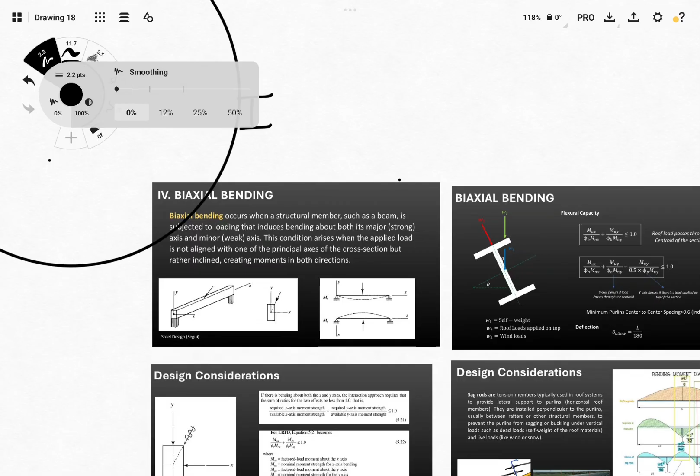This happens because of two ways. First, if you have loads applied on the weak axis - like a uniform load or concentrated load along the length, applied laterally on the y-axis. So for example, we have this section with loads like that, whether uniform or concentrated, applied along the sides of our section.

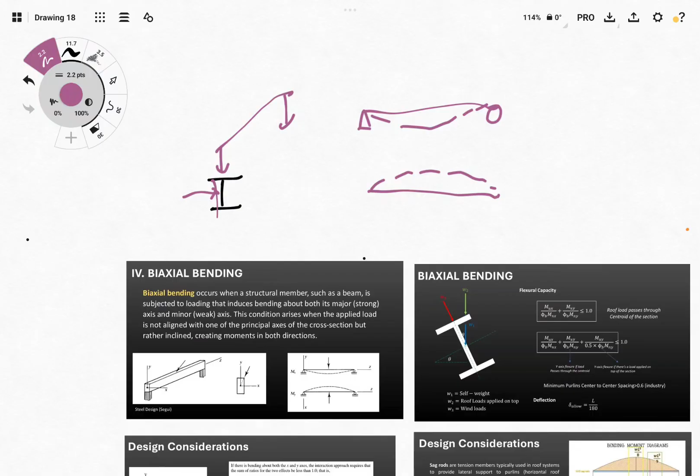It will develop a moment on the weak axis, unlike the usual case where our load is transverse or gravity loads - a uniform load causing deflection or bending along its longitudinal axis. But when we load it laterally, looking at the top view, it will also have deflection but sideways, the same as lateral torsional buckling - the sideways bending is caused by the moment about the y-axis.

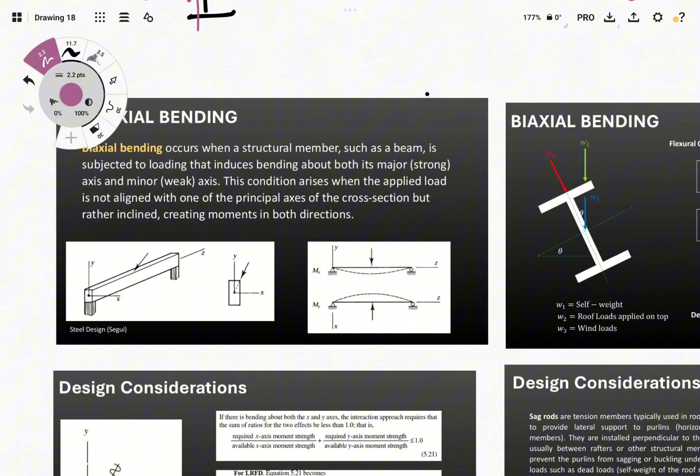When your section has an inclination, even if your loads are just due to gravity, it will have components - what we call normal and tangential. The normal acts along the strong axis while the tangential acts along the weak axis. So those are the two ways we can have bending moment about the weak axis.

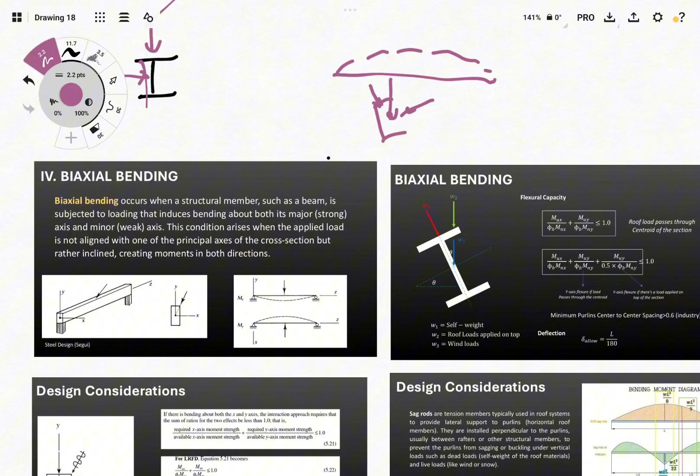First, if you have loads applied laterally, and the second one, if your section has an inclination or orientation that is not with respect to the usual horizontal axis.

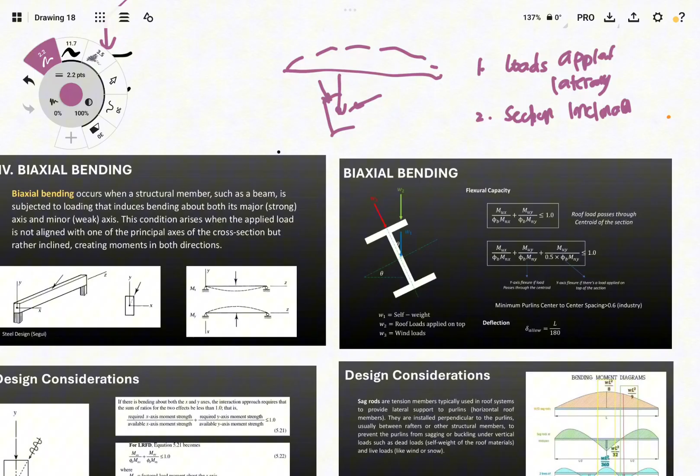Okay, so how do we treat this? The most common case in CE2212 - we'll focus on the section oriented with an angle of inclination. That will be our example for this discussion.

So what do we do? What are the common loads applied if we have this kind of section, especially for roofings or purlins? These are the common loads.

First, the self-weight - that never goes away. And what do you notice? W1, due to self-weight, is applied at the center of the cross-section.

The second one is still a gravity load, but this comes from our usual roof loading like superimposed dead load or live load. It is still applied at the center, but now at the top of the section - not directly at the centroid, but the application is up there. Since most of our roof loadings are placed here, we assume these loads are applied at the top of the section.

So W2 is still a gravity load, and it includes both the live load and the superimposed dead load, applied on the top of the section.

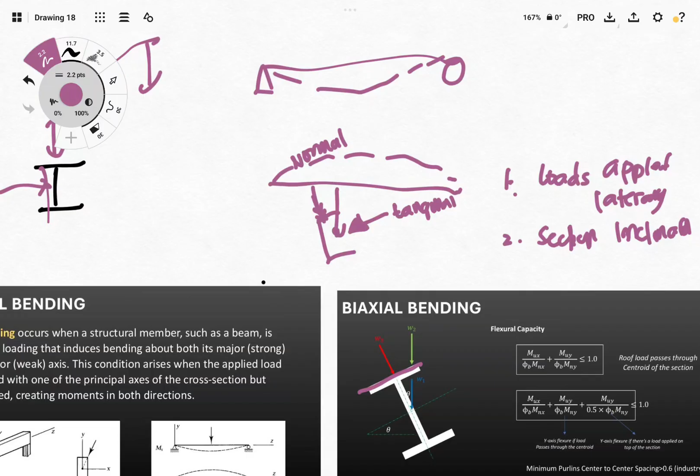Right? So they're different - tangential becomes the lateral load, and normal, when rotated, becomes like the gravity load.

Now the issue is that the gravity loads, especially W1 and W2, will have components - W2 will have a tangential and a normal component. The same goes for W1.

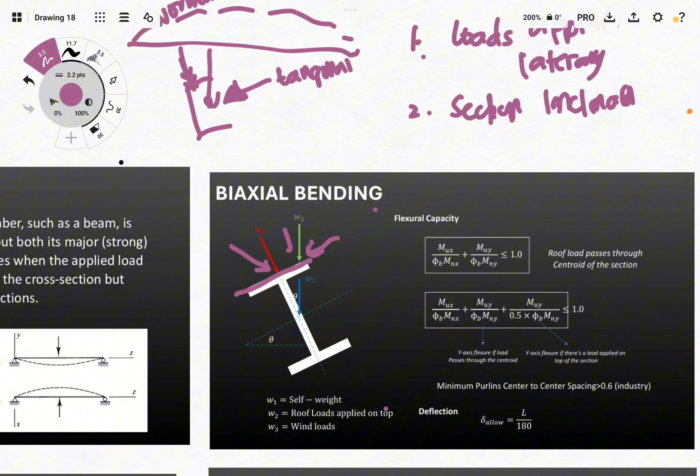But our wind load, W3, as is, is applied perpendicular or along the normal axis of the section, so it won't have a tangential component - unless W3 has a specified orientation. That's how the application would be, but most of our assumptions for wind load is that it's directly applied normal to the axis of the section. So those are the loads we're interested in for purlins or roof flexural members placed on the roof.

Okay, so how do we treat this kind of problem? The same way as we treat uniaxial bending, but with an additional component.

The best way to say if a section is safe is through DC ratio. We know that DC ratio is demand over capacity. The demand is based from the loads. We need to obtain the values of the moments due to the applied loads, and also the capacity of our section. So that's the demand over capacity.

Unlike in uniaxial, where that's already enough to know if the section is safe, since we now have two axes in consideration, we have two types of moment. We also need to compute for the DC ratio contributed by the moment applied about its weak axis, which is MUY over the capacity along its weak axis.

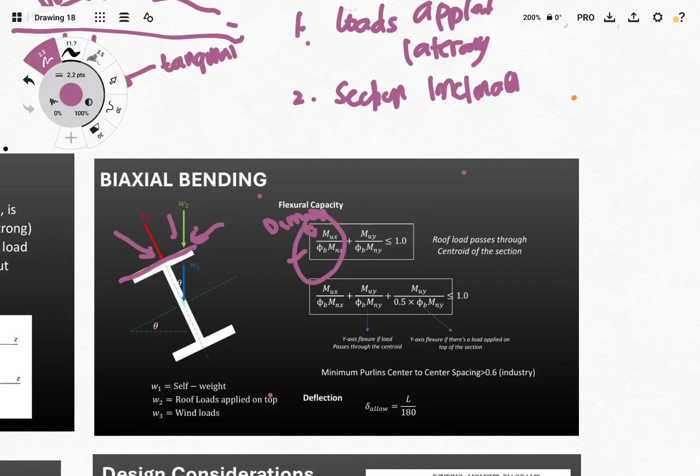The concept is the same. We already know how to solve for the flexural capacity for the strong axis. We just add section 506.6 for the weak axis bending. For weak axis bending, take note that there's no lateral torsional buckling. It's only when we check for the tendency of slender elements or local buckling that we can solve the capacity about its weak axis.

But there's an additional note you have to consider. We need to separate the tangential loads, because the tangential loads developed by the roof loads applied on top have a different consideration for the capacity that we are going to use.

If your loads are applied directly at the center, which is mainly the tangential load caused by the self-weight, we consider the full moment capacity of the weak axis. But if we consider the tangential load caused by the loads applied on top, then it becomes only half of the capacity, because it's applied at the top, not directly at the center. So we assume the moment capacity resisting the loads applied at the top is only half of the capacity, since it's only acting on that part.

So that's how it is. Later on you will understand this, and find out how to separate the loads so we can obtain the DC ratio, with the tangential loads applied at the center separated from the tangential loads applied on top of our section. Make sure that for the section to be safe, the total DC ratio must be less than 1.

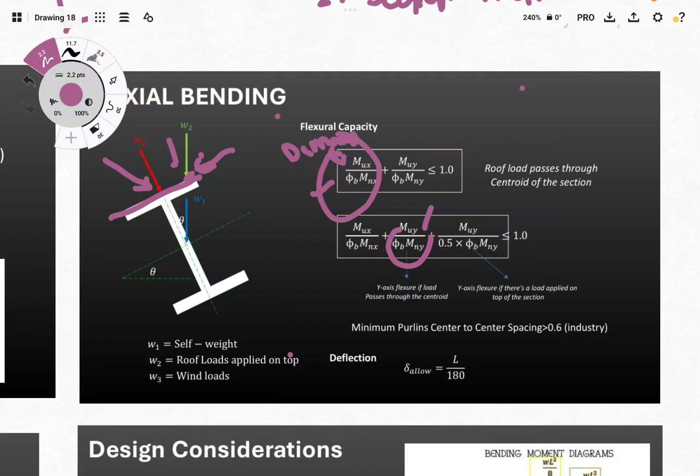As long as you've solved that the section is okay even with a spacing beyond 0.6, then the section is fine. But if you increase the spacing, the tributary loads also go up, because to convert the floor loads into uniform loads, we consider the tributary width. The loads we apply from the code are usually a uniform pressure load in kPa, so you need to multiply it by its tributary width to get the uniform loads.

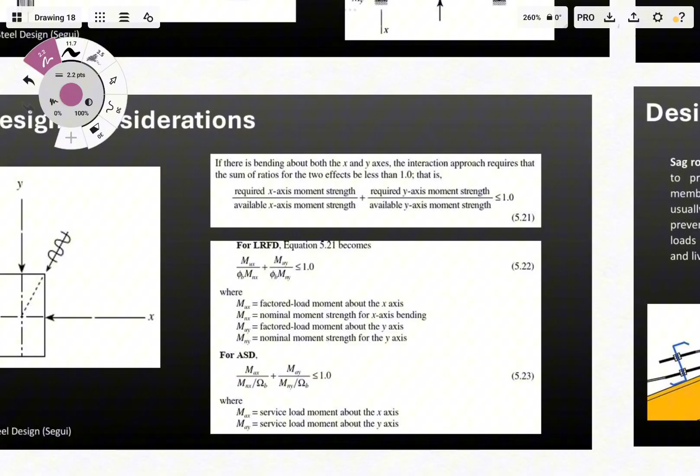So those are the considerations. These are some additional formulas, similar to what I showed before, but here it's not specified which capacity to use whether the loads are applied at the center or at the top of our section.

Now we have this additional important note. These are the sag rods, in order for the section to not deflect or move sideways. It will act as a bracing for our strong axis, to prevent excessive sagging or lateral sideway movement of the section. So we add these sag rods, which act as a lateral bracing for the section. When you have sag rods like this, the unbraced length of the section is reduced. So the effect of that is on the length, the unbraced length that we consider when we solve for the strong axis section.

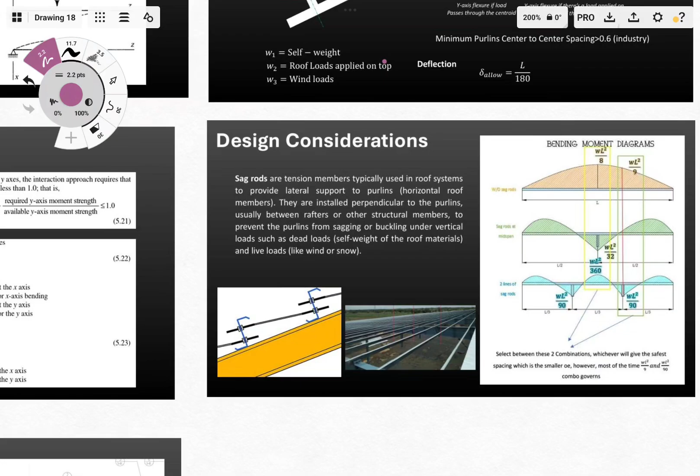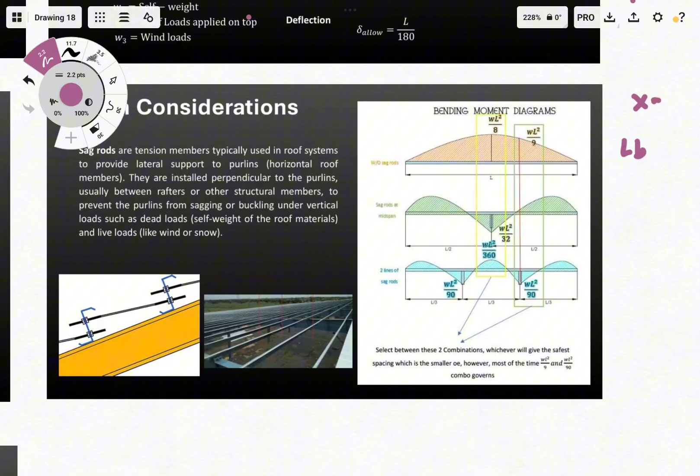So when you have sag rods, and the problem states there are sag rods at midspan, the LB you will use for solving the flexural capacity will become half. But in solving for the maximum moment, you still need to use full L. That unbraced length is only used to solve for the capacity. Now, the effect of that will also affect something else.

When you have sag rods, the moment in the y-axis will change, although our loads are considered uniform load, and the purlins are simply supported, wherein your maximum moment is just WL squared over 8. But that is the maximum for the x-axis. If you consider the moment in the y-axis, it changes, since the sag rods act as supports in the y-axis. So this one is for y-axis, this is for x-axis. But for the y-axis, the moment diagram could be like this, or like this, or like that, depending on what is specified in the problem.

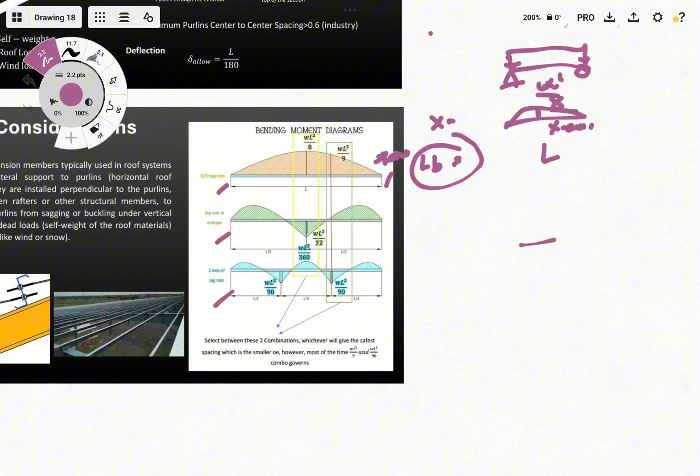So when this happens, we need to find the maximum moment - later on I think you'll understand this better. For example, if the problem states that the sag rods are applied at center, the maximum moment you'll use for x-axis or strong axis, MUX, is WL squared over 8. But when there's a sag rod, for the y-axis, it's not WL squared over 8 that you'll use anymore. The maximum moment for y-axis becomes WL squared over 32. But if there's no sag rod, that moment is just WL squared over 8.

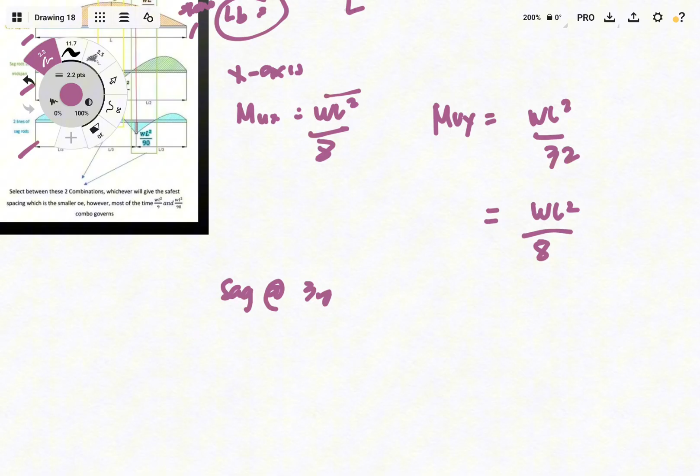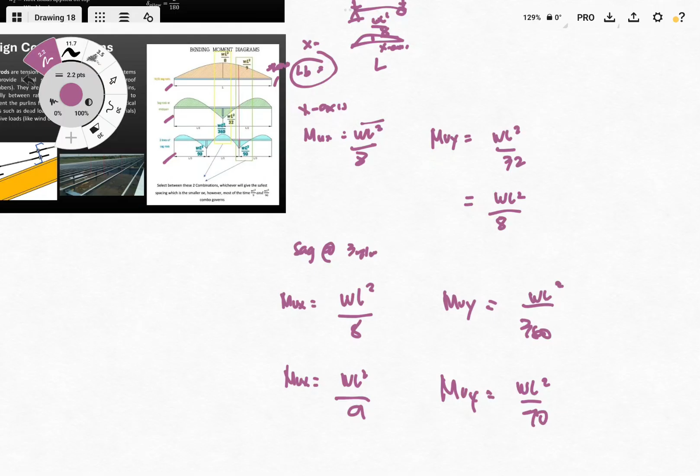Now, if you have sag rods applied at third points, there are two combinations needed. For example, if you have sag rods at third points, for your x-axis, the MUX can be WL squared over 8, and for your y-axis it becomes WL squared over 360. But you also have to check the combination where your MUX becomes WL squared over 9, and the corresponding one for Y is WL squared over 90. Whichever gives the maximum moment will govern, that becomes critical. So you have to check each of those moment diagrams.

Okay, so let's have this problem. A roof system is supported by trusses spaced 6 meters apart, and the purlins used in this system are ASTM A36 and are equipped with sag rods positioned at their midpoint.

Positioned at their midpoint. You may hear some hammering noises, so I try not to go live sometimes because of this. We're not certain when the hammering will happen, because there's construction going on. But regardless of that, we will still be having this asynchronous lecture, and I hope if you have free time, so that we don't need to have a meet up, what do you call it, makeup classes, then we can have this asynchronous online session.

Okay, so going back to this problem, we have the roof inclined at 15 degrees. So these purlins are designed to carry service dead loads, with a pressure load or floor load of 300 Pascal, a service live load of 400 Pascal, and additional wind pressure of 0.8 kilopascal. The first thing we need to solve is assess whether the purlins spaced at 0.8 meters apart are structurally adequate for flexure - we won't check shear yet since we haven't discussed that.

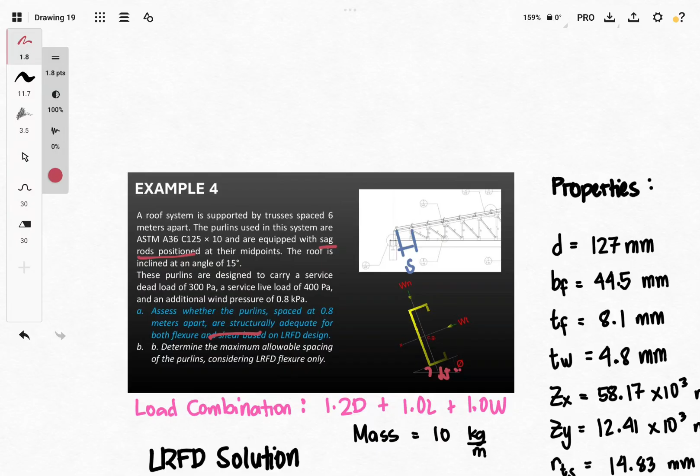The second one is to determine the maximum allowable spacing of the purlins considering LRFD flexure. In your handouts, the properties aren't given, but you can screenshot this so that if you want to rewrite this or try to solve it on your own, these are the given values to guide your solution. And for the load combination, I'll provide that as well.

You have to check those load combinations provided sa NSCP, especially if given yung wind load. We're going to use this load combination para mas ma-compress or mas maging short na lang yung solution, kasi in actual we still need to check kung ano yung load combinations na magbibigay talaga sa atin ng maximum load.

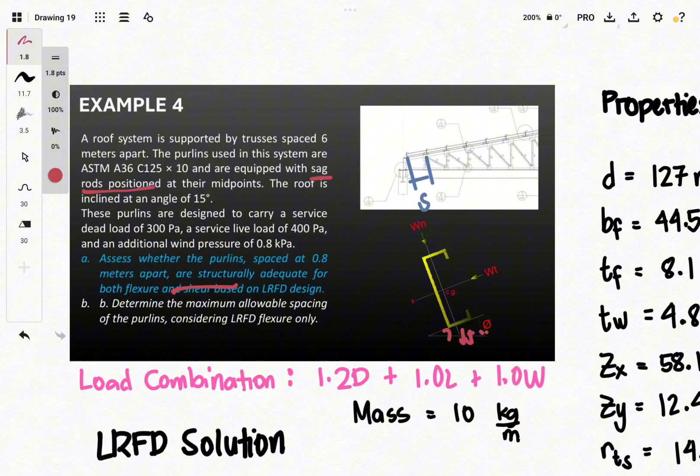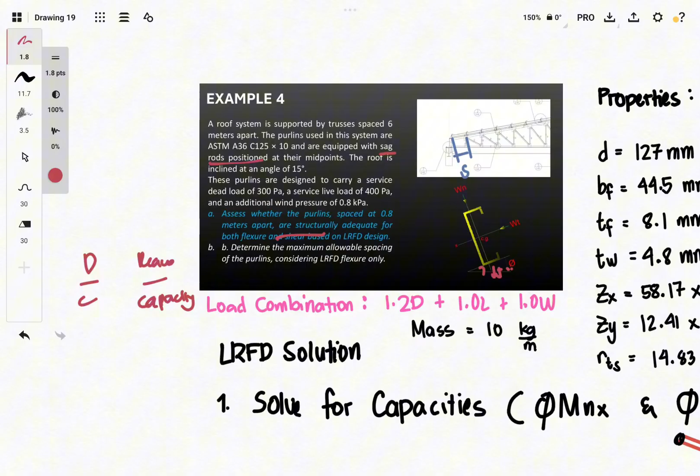So the first step in solving this problem is either you can solve for the loadings or yung required, kasi ang goal is to solve for the DC ratio, the required over capacity. Kahit ano naman yung direction ninyo, pwedeng mauna yung pag-solve ng loadings or yung moment due to loadings, or pwede din namang unahin nyo muna yung pag-solve ng capacity. So kahit alin dun sa dalawa, basta ang goal is buo tayo ng interaction equation na kung saan nandun both yung loadings, yung required or yung demand, and then yung capacity. So ngayon, we'll just follow the track na we're in.

Yung first natin na i-solve is yung capacity ng section for its strong and weak axis. So start muna tayo dun sa strong axis. Strong axis is applied along this axis ng section, so yun yung tatawagin natin MUX. MUX kapag ito yung axis, but since rotated na yung section, we have the normal and tangential. Yung effect nito dun sa section is of course deflection along its longitudinal axis. Yun naman yung common if you have gravity loads, kasi dito siya applied.

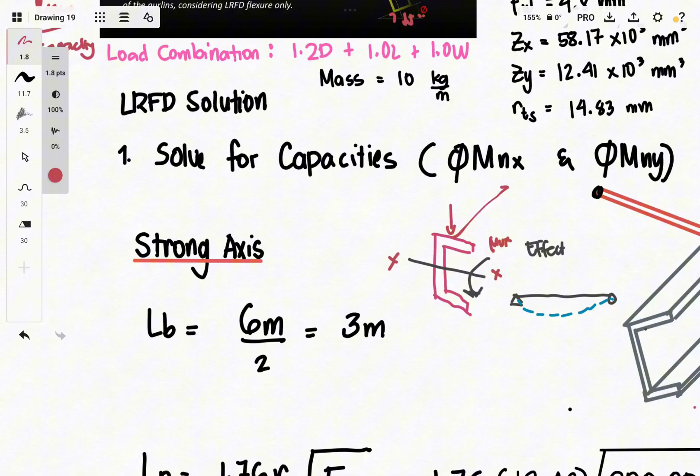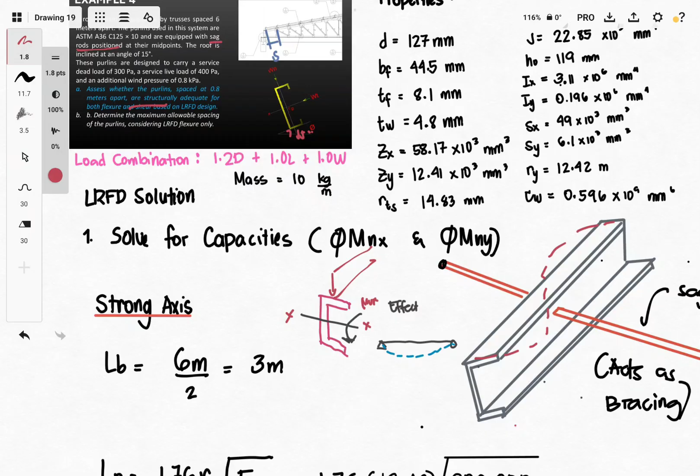So meron tayong sag rod applied at the midspan, and it will act as bracing. Kapag ganyan, yung maging buckling niya is half na lang. So we'll be limiting yung unbraced length, which is yun yung basis natin when we try to solve for its capacity considering LTB. So for this problem, since meron tayong sag rod applied at midspan, hatiin nyo lang yung unbraced length, which is from 6 meters magiging 3 meters na siya.

And now we need to check kung merong LTB yung section. So the first thing that we need to solve is yung LP, and then if less than LP, then there's no LTB, walang nag-exist na LTB. But if nag-exist, kailangan pa nating mag-check nung additional criterion wherein para ma-classify natin if yung LTB will be inelastic or elastic.

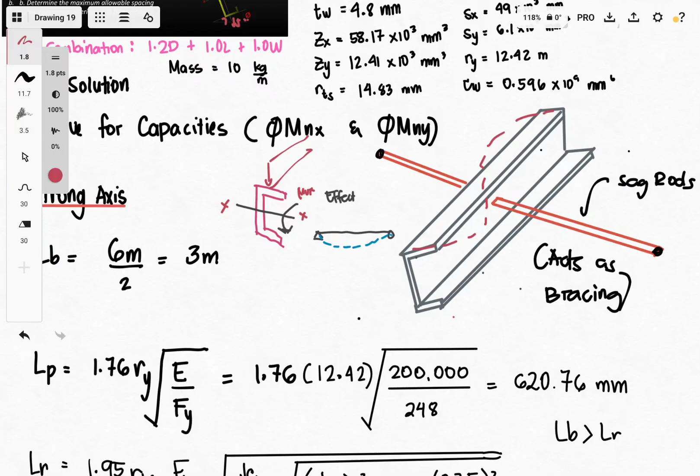Okay, so for this one, you need to solve for LP and applying the properties na given sa problem, then it gives us 620.76 mm LP. And if we are going to compare it with the unbraced length ng section natin ng beam, then mas mataas siya. So palitan nyo to, no, LB is greater than LP.

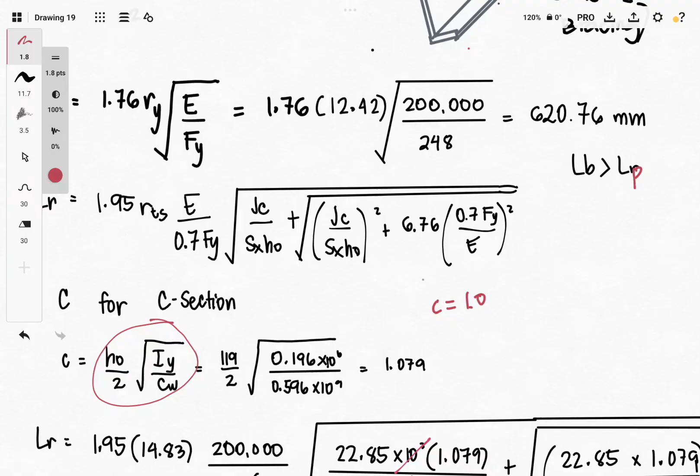So therefore, we still need to check yung LR. Yung LR is yung mahabang equation, and ito yung formula natin doon. Since we'll be using a C section, hindi siya I section because for I, yung C value is 1.0. But if ang kinoconsider natin is C section, we need to solve for the C using this formula, HO over 2, square root of IY over CW. IY is already provided, and ganun din, yung CW, and also yung HO.

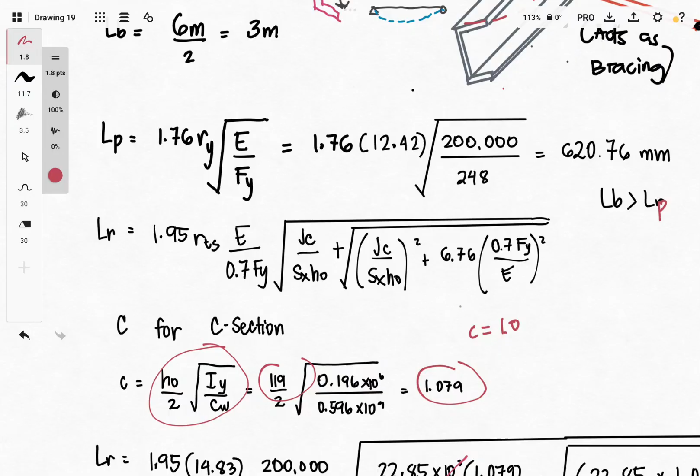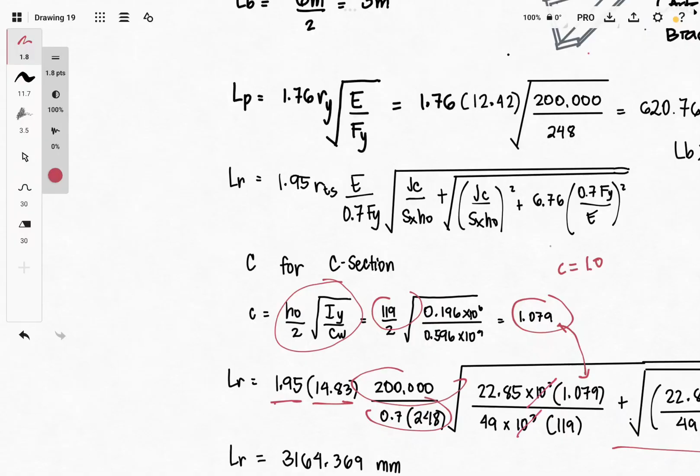So, using your calculator, then it will give us 1.079, and yun na yung ilalagay natin dun sa formula. So 1.95 for LR, 14.83 is yung RTS, and 200K over 0.7 times 248. Pwedeng mag-cancel na yung 10 raised to 3 kasi both naman ng mga values na to ay merong 10 raised to 3, so pwede nyo na yan ma-cancel. Then continuing this long formula, apply nyo lang, plug in lang yung mga values, and evaluating this, it will give us 3164.369 mm. And if we're going to check it with the LB, no, which is 3 meters, then it is now less than dun sa limit ng LR, which is 3.164.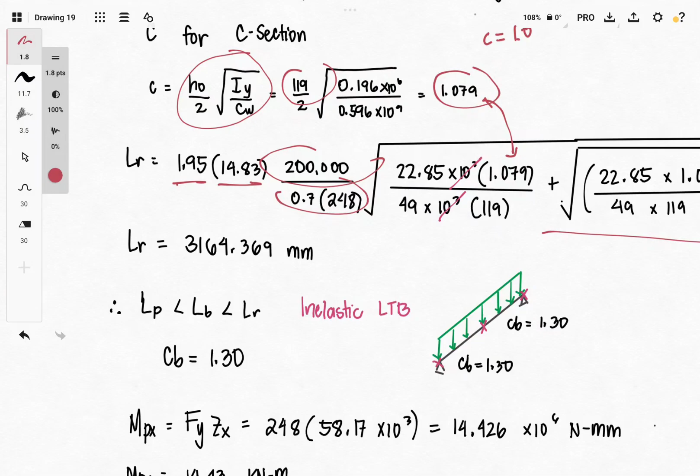Therefore, yung behavior ng LTB magiging inelastic. Now, for solving the capacity under the inelastic LTB, from the code, ito yung magiging formula. And dun sa formula, meron tayong bending modifier. Yung bending modifier, if given yung load natin ay just uniform load and meron tayong bracing sa midspan, then yung CB ay 1.30. Pero iba yung CB value kapag kung wala tayong bracing.

So, check nyo na lang sa table kung ano yung value kapag walang bracing, or kung hindi kayo sure dun sa mga formulas na kalimutan ninyo, then you can solve it manually naman using the formula na 12.5 Mmax, but ang kailangan nyo lang is makapag-construct kayo ng moment diagram. So yan lang naman yung kailangan ninyong tandaan if hindi given yung CB.

From the table, we know that CB is 1.30 for uniform loading and simply supported, so we can use this in solving for the capacity. But make sure that the limit or cap capacity of the section is not allowed to exceed beyond the full moment capacity. So whatever we solve here should not exceed MPX.

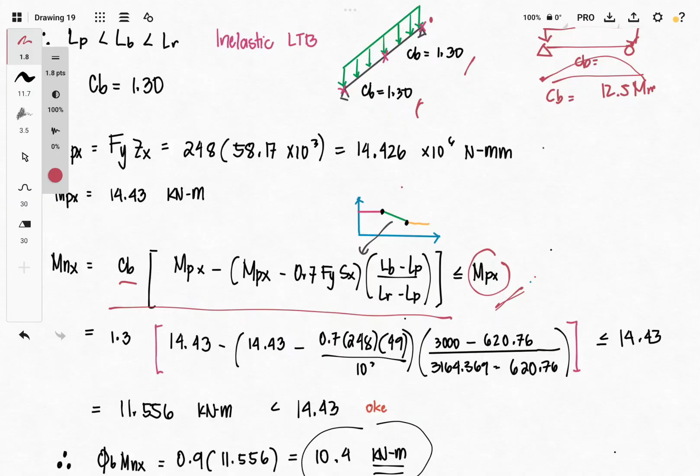Otherwise, we'll be using MPX as its maximum capacity. So first, let's solve the plastic moment capacity. The formula is FYZX. 248 and ZX are already given and give us a value times 10 raised to 6. Divide it by 10 raised to 6 to get the value in kilonewton meters. Now, going into this formula, we apply 1.3 CB, while MPX is still the plastic moment capacity. Just plug it into the formula.

But also make sure about the units, because if you get confused about units, what should cancel out, what to divide by 10 raised to 3, you'll get a different answer. For this problem, you can just divide by 10 raised to 3 and remove the times 10 raised to 3 from SX, the elastic section modulus. And for this term, you need to multiply by the ratio of LB minus LP over LR minus LP.

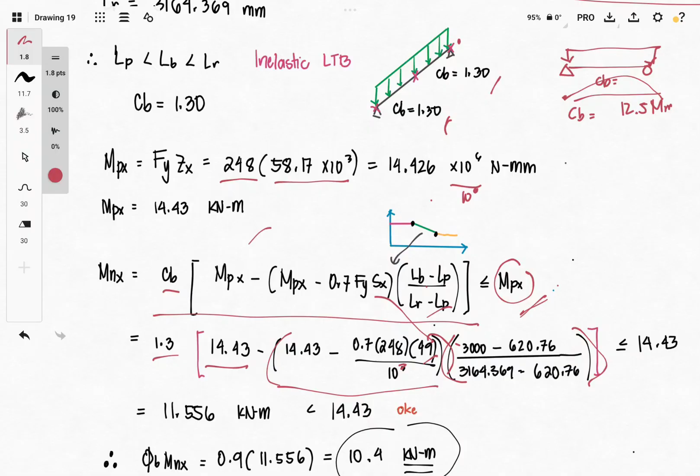Solving this gives us 11.556 kilonewton meters, and comparing it with our MP of 14.43, the value we got from the inelastic LTB formula is lower. So it's okay, we can use 11.556. But if what you got there is higher, then you have to stick with 14.43. Since that's not what happened here, we can use 11.556.

Okay, so this is still nominal, class. You still need to multiply it by 0.9 if the problem specifies LRFD. But if it's not specified whether LRFD or ASD, you have to solve for both. For this one, we assume LRFD only, so it gives us a maximum design strength of 10.4 for the strong axis.

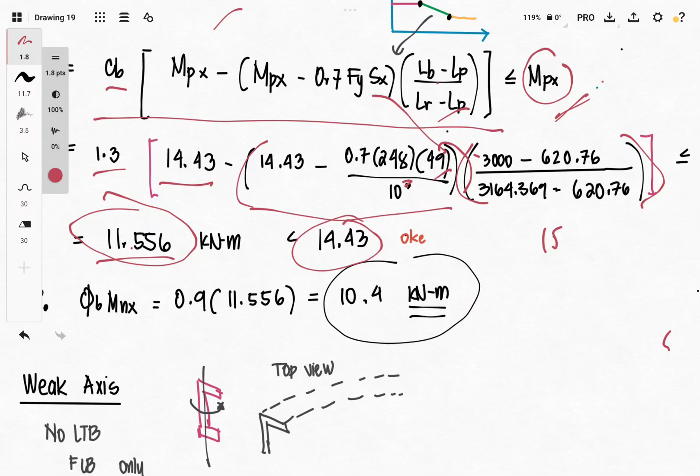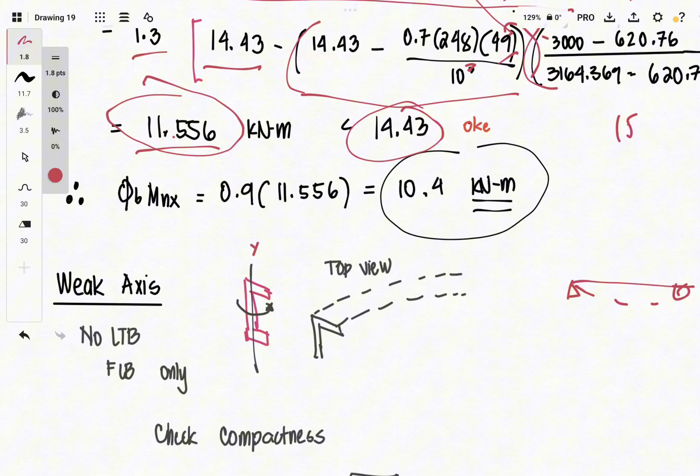Now, going to the weak axis, the application is along the Y axis. So it's weak axis bending, and the effect is still deflection but sideways. You have to look at the top view. It's not like the typical deflection along its transverse line—now the deflection is sideways. And what resists that deflection are the section properties for its weak axis.

For weak axis, we don't have LTB, only flange local buckling. So you only have to check if the flange is compact or not compact. For this one, flange local buckling uses BF over 2TF—but it's not really BF over 2TF since we're not considering the wide flange. For this one it's just the flange width and the thickness of the flange.

So for this problem, 44.5 over 8.1—let's check the exact value of this on the calculator for everyone's clarity. So we get 5.49, and therefore this is less than 10.79, which is our limit criterion for flange compactness. So the section is compact, our flange is compact.

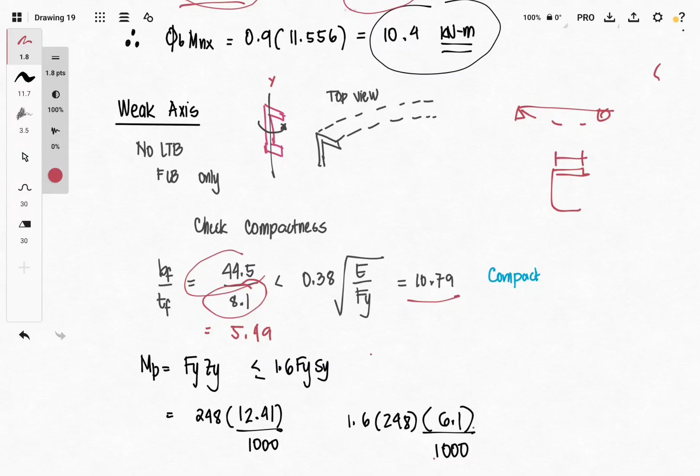From the code, you can use FYZY, but you have to make sure this is less than our maximum capacity. We have 1.6—it's not allowed to exceed 1.6 FY times the elastic section modulus for the y-axis. If it does exceed 1.6 FY, we have to limit our capacity to 1.6 FY times Sy. For this problem, we just put FY 248 into the formula, 12.41, and then solve for 1.6 of FYS.

Evaluating the formulas gives us 3.078, and for 1.6 we get 2.42 kilonewton meters. Comparing these values, 3.078, the plastic moment of the y-axis, is higher. So we'll be using 2.42 as the nominal capacity for our weak axis.

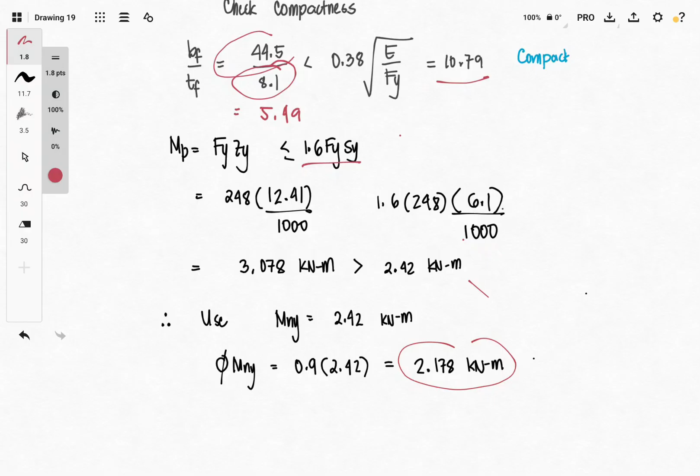We still need to apply the reduction factor to get the design strength—evaluating this gives us 2.178 kilonewton meters. Now that we've completed the section capacities, we can solve for the loads, the moments in both axes due to the applied loads. We need to separate the analysis once all the loadings are applied to the section. So we have the loads applied due to self-weight—that never goes away, there's always self-weight.

And we also have the loads applied at the top, which is the floor loads. This is composed of our dead load, superimposed dead load, and floor live loads. The third type of load is the wind load, wherein it has no tangential component, only normal. So our wind load is applied perpendicular to our section, meaning we have no tangential loads.

Since we have gravity loads applied at the center, due to self-weight, it doesn't exactly fall along the normal and tangential axis. Therefore it will have components, so we can solve it based on the orientation of the section. So we have to solve for the components of W1, and also solve for the components of W2.

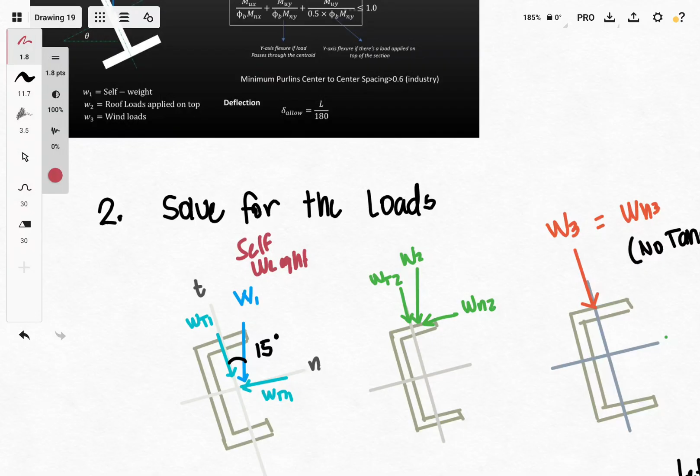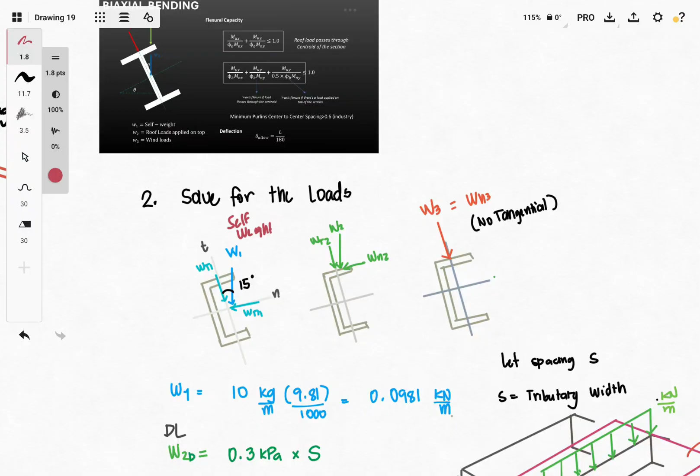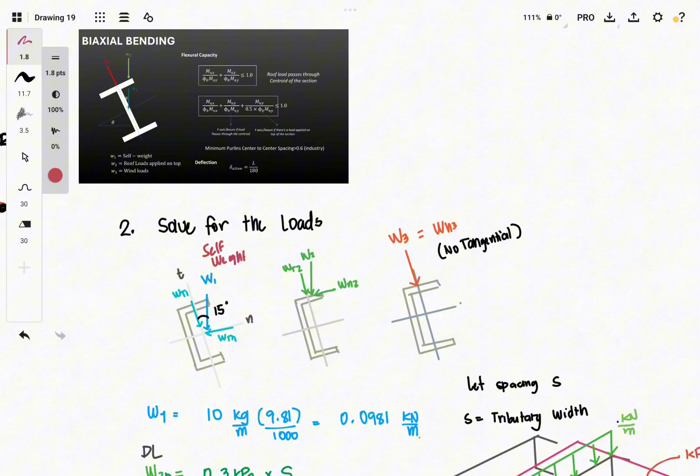Now we can solve first for the loads in terms of distributed load. Let's convert them into distributed load. The first one, the load due to self-weight, where do we get it? From the weight or mass of the section. It's given in the problem as 10 kg per meter, but that's in kilograms, so we need to convert it into unit weight: 9.81 over 1000, which gives us 0.0981 kilonewton per meter.

Now for the second type of loading, applied at the top of the section, we have the dead load, converted into kilopascal. The 300 pascal, we just divide by 1000 so we get 0.3 kilopascal. And for live load, 0.4 kilopascal.

So our goal is to make it a uniform load. The kilopascal unit is kilonewton per meter squared. To make it a uniform load, we need to multiply it by another distance or spacing that has units of length, so it needs to still be in meters. Where do we get that additional length? We get it from the tributary width.

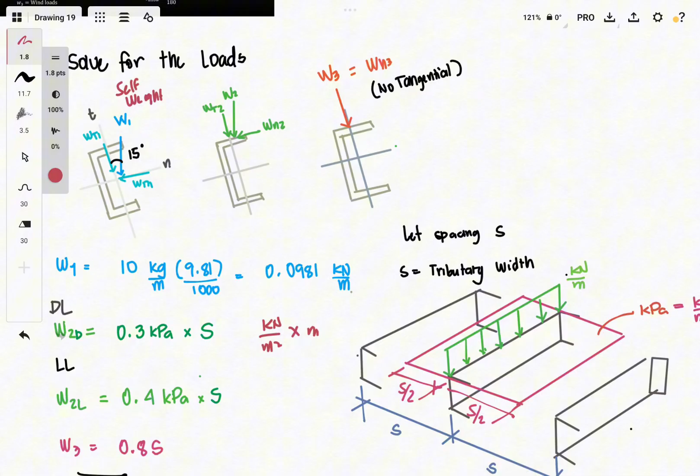The tributary width is based on the spacing center to center of the purlins or beams. For this case, say for example we have purlins, and the problem states the spacing is 0.8. The loading of one section is taken as half of the spacing plus another half of the spacing on the other side, and that becomes the tributary width of this beam.

Same thing for the other purlins: half of this S, and then if it carries another load on the other side, half of that too, and that becomes its tributary width. That's what we'll use as the basis to convert the floor loadings from kilonewton per square meter into a kilonewton per meter type of loading.

So once you multiply it by the spacing, or the tributary width — since S over 2 plus S over 2 just gives us the whole spacing — once you multiply that by the spacing, the units of the floor loadings become kilonewton per meter.

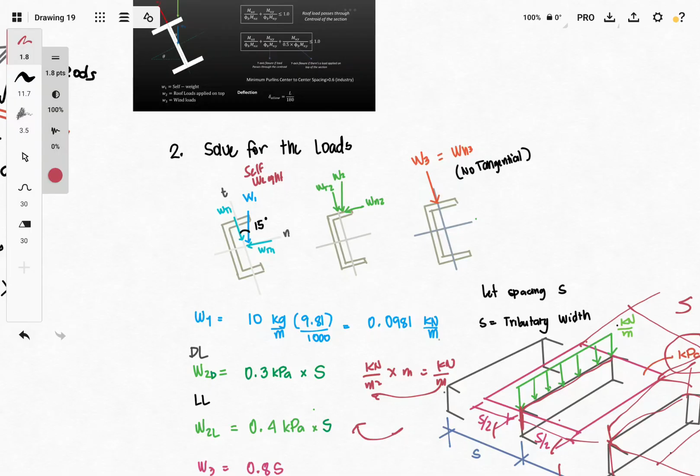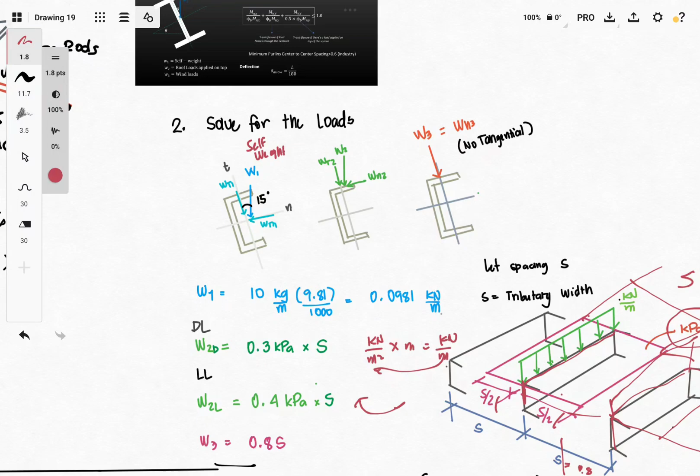The third type of load is the wind load, and that wind load is also a floor loading or pressure load, in kilopascal. To make it a uniform load as well, we also need to consider and apply the tributary width. So W3 will also have an S in it, but its units will be in kilonewton per meter.

So what we got so far are service loads, and to make them ultimate, since we're following LRFD solution, we need to apply load factors. For the first type of load, self-weight, this is just dead load, so our multiplier or load factor is 1.2. 0.0981, and it gives us 0.11772 once multiplied with the service load.

Next type of load is the one applied at the top, our floor loadings. For the second type of loading, we have dead load and live load. Where do we get it?

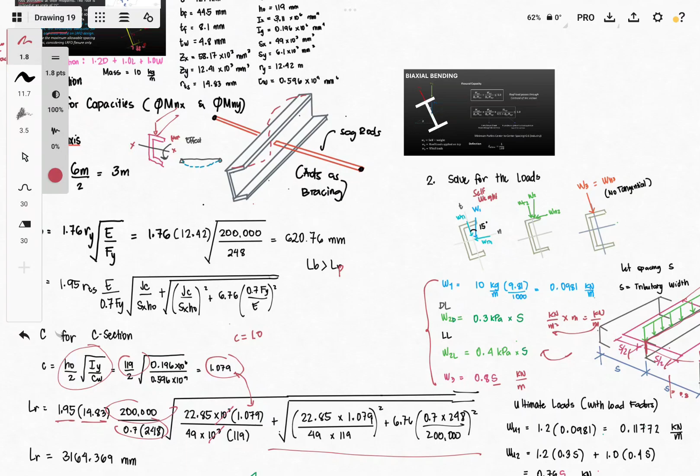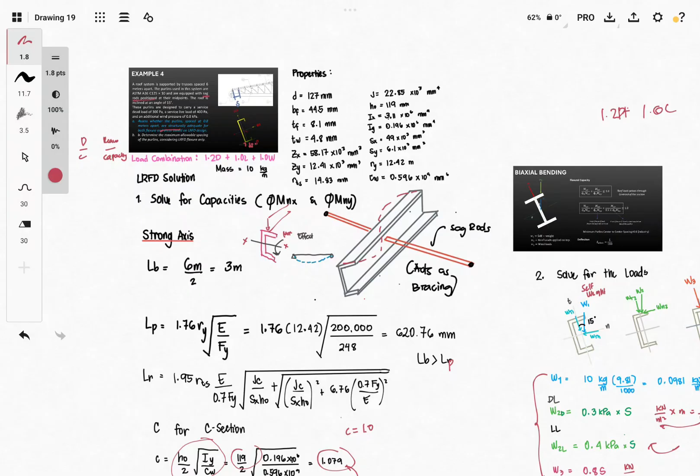Dito na, isang load combination lang yung gagamitin. Pero kapag sinabi sa problem na you also have to check yung 1.2 dead load plus 1.6, dadami na yung mga kailangan i-check. But for this problem, para mas madali, ang loading na gagamitin natin o yung load factor na gagamitin for live load ay ito lang, 1.2 dead load plus 1L, kasi pagsasama-samahin lang din natin siya, lahat ng mga loadings, yung contribution ng loadings at the end of our solution.

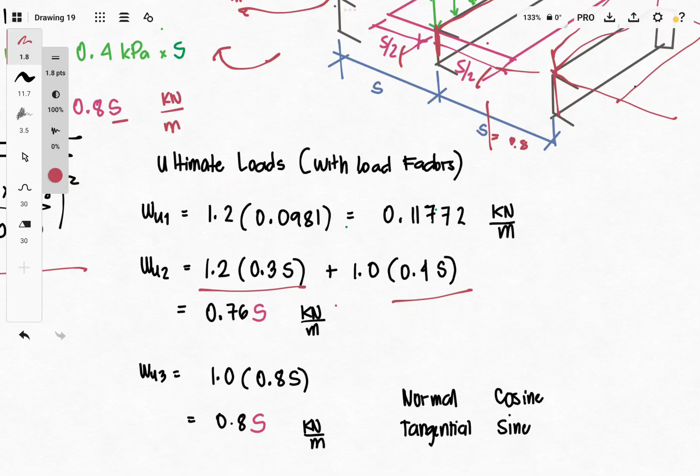Para makuha natin yung ultimate, pagsasamahin lang natin yung 0.3 and then meron tayong load factor na 1.2, and due to live load, 0.4 na 1, and will give us 0.76S in terms of S, but naka-uniform loads na. Next, the third type of load factor natin is from the load combination na given, 1.0 din, multiply it by 0.8S, then it will give us 0.8S na in terms of kilonewton per meter.

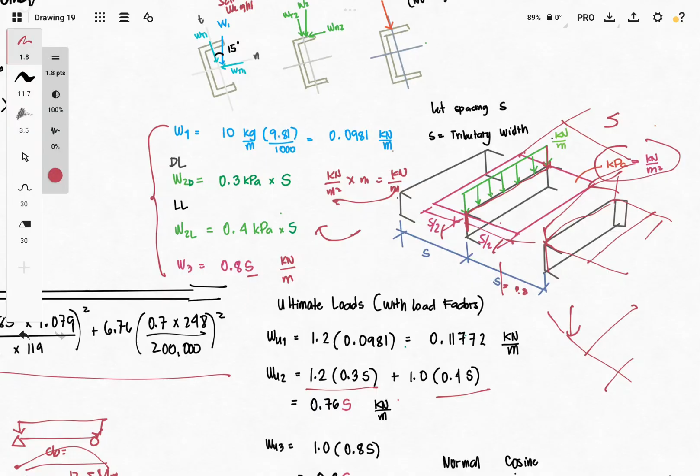Para makuha natin yung ultimate loads, apply dun sa mga axis nila, kasi yung W1 and W2 ay gravity loads. So ang goal natin dapat nagpo-fall siya along sa axis, kasi kapag hindi yan nakapag-fall along the axis, iba din yung orientation ng moment. Ang moment kasi natin dapat naka-apply dun sa mga axis exactly, kailangan natin kunin yung component ng mga loads na hindi applied directly dun sa axis ng section.

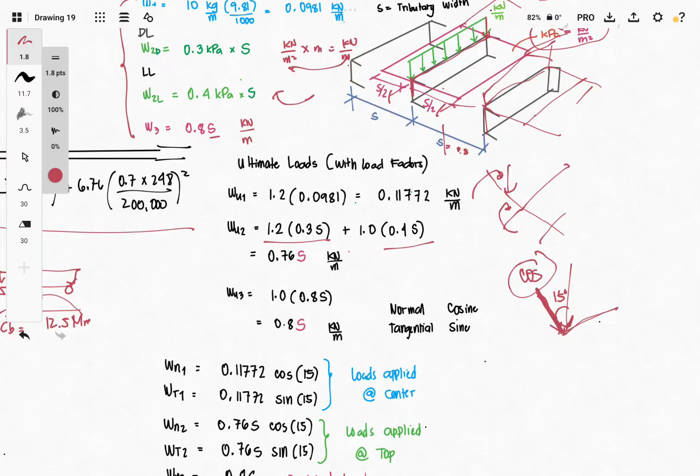Para sa ating first type of loading, magkakaroon siya ng components sa tangential axis and sa normal axis. Since ganito yung load natin, yung adjacent na component, this is the angle 15 degrees. Pag adjacent, cosine yung gagamitin, which is yun yung normal. At dun sa tangential axis, this is the opposite, so we'll be using sine. Ito na yung magiging values ng mga component.

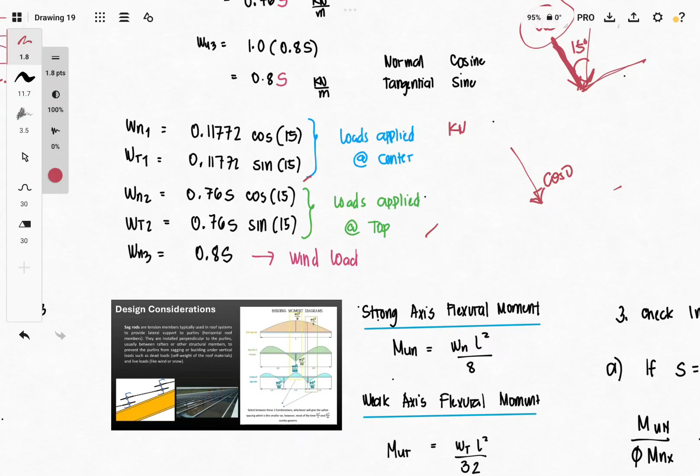The same way goes to our second type of load, you need to apply the trigonometric function in order to get its components. While for the third one, since applied na siya directly dito, cosine ng 0 ay 1 lang, so directly normal lang yung components niya, wala siyang tangential. Kompleto na yung mga loadings natin, uniform loads, and applied na sila directly dun sa axis ng section based dun sa given orientation.

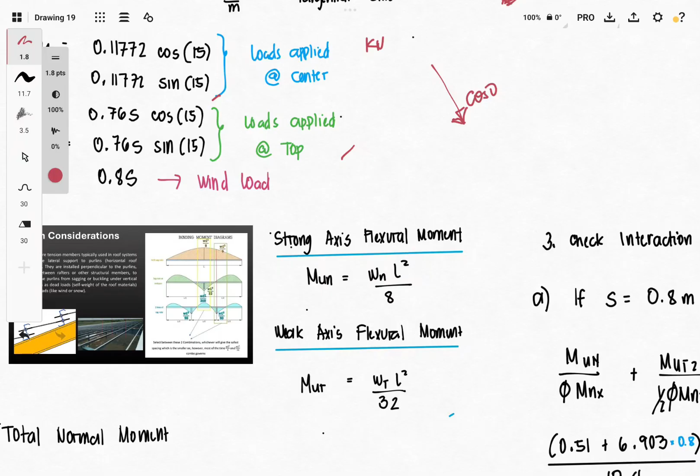Ano na yung gagamitin nating formula for the maximum moment? Since meron tayong sag rod, nagbabago, sa weak axis magbabago na yung moment niya. Yung maximum moment will be WL squared over 32. Pero for the strong axis o yung normal, ito yung made-develop na moment sa normal axis, and it is acting along the strong axis of our section. While yung tangential loading natin will be acting along the weak axis of our section. So these are the formula that we are going to use for the moment that will be developed on both axes.

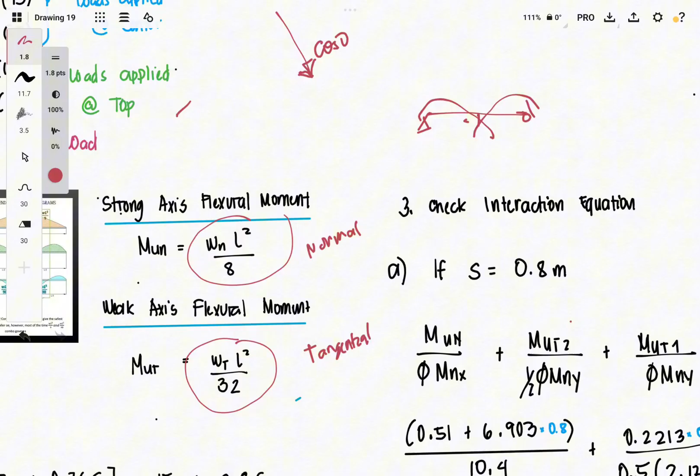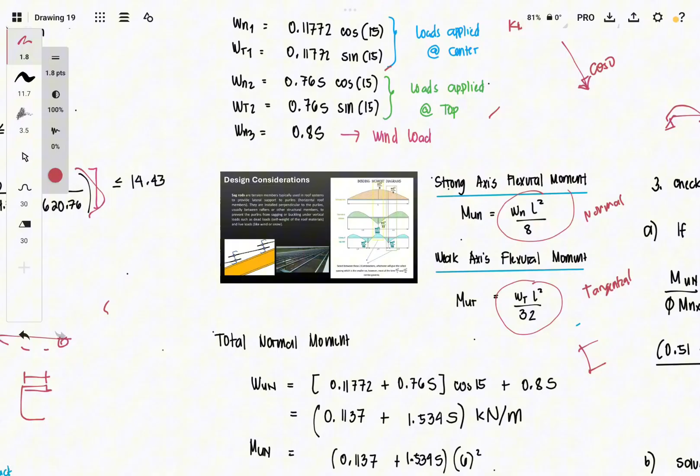Kailangan pag-iwalay natin yung mga moment na mapoproduce if meron kayong loads applied sa top and meron kayong loads at the center. So the first one is the total normal moment. Kapag total normal moment, kung mapapansin niyo dun sa interaction equation, isa lang siya, pwede natin pagsasamahin lahat ng loadings applied sa normal. Ang magiging magkahiwalay lang ay yung mga tangential loadings na applied sa top and then applied dun sa center.

Kasi yung tangential, magiging ganyan, and then meron kayong sa center, meron din ganyan. Magkahiwalay. Pag nandito yung tangential ninyo, nasa taas, half lang yung magiging capacity sa weak axis na i-consider. Pero kapag nandito, full moment capacity ng weak axis yung gagamitin for the interaction equation. Pero for loadings na applied sa top and then yung normal component nun, tatama pa din siya sa center, kaya hindi natin kailangan gawing half yung capacity ng strong axis.

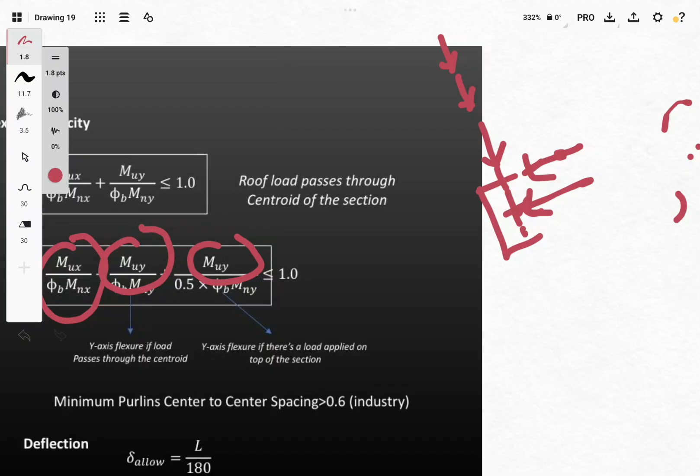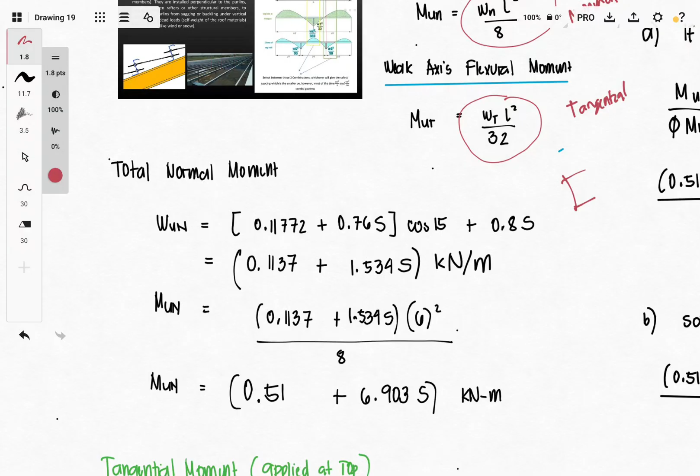Pagko-combine lang natin for all types of loading. Kapag normal yung load ninyo, hindi niyo na kailangan paghiwalayan yung loads na applied sa top o applied sa center, pwede natin pagsamasamahin kapag normal yung pinag-uusapan. So for total normal moment, pagsamasamahin muna natin yung total normal uniform load. Ano ba yung mga loadings? 0.1772, this is yung WN1. Since both yung loads na applied sa center and applied sa top merong cosine siya, yung normal nun, pwede natin i-factor out yung cosine 15 and pag-add na lang natin yung 0.1772 and yung 0.76S. Pero hindi natin siya mapag-add kasi meron tayong unknown variable na s.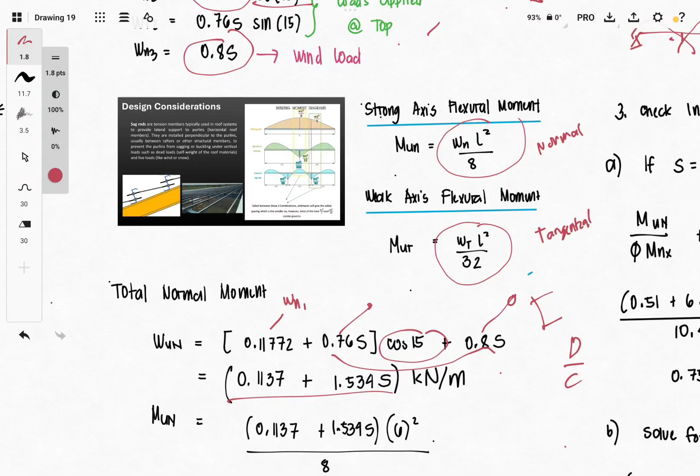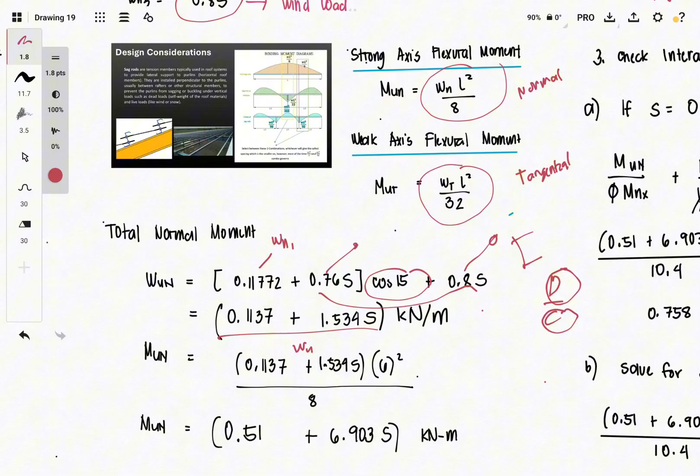Applying the maximum flexural moment acting along the normal axis as L squared over 8, using the total uniform normal loadings, this is what we get. Let's separate them, so what I did here is...

0.1137 times 6 squared over 8, giving us 0.51, but please double check since this problem has some given values changed from last year, so you'll get a different answer.

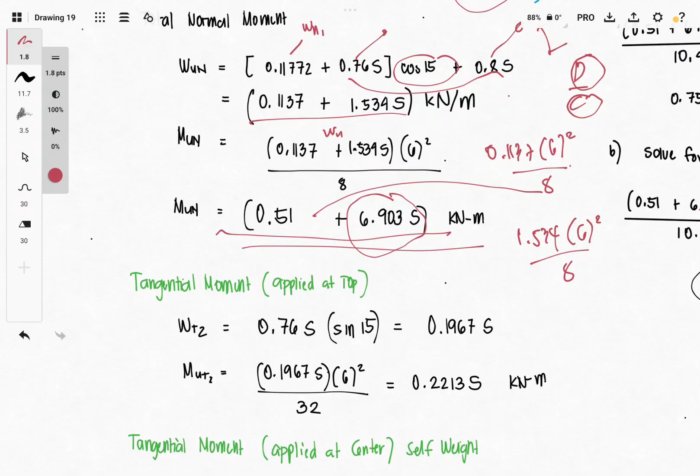Next, for the tangential moment applied at the top, we cannot combine the tangential loadings applied at the center and at the top. They need to be separate. For now, let's start with the moment from the load applied at the top of the section.

So what's our uniform load, tangential, applied at the top? We have 0.76s, and now it's sine since we're dealing with tangential. This gives us 0.1967.

And to get the tangential moment from this loading, we just use the formula for the weak axis flexural moment, WL squared over 32, giving us 0.2213 in terms of this unknown s.

Now for the tangential moment developed from the self-weight applied at the center, we just use 0.11772, but with sine since it's tangential, giving us 0.0305.

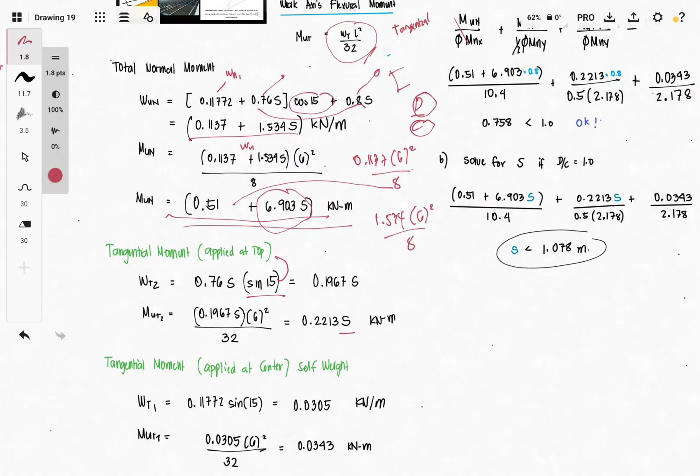And to get the tangential moment, we apply the formula and get 0.0343 kilonewton meters. Now our moments are complete, and so is the capacity.

Then we can use the interaction equation. So the interaction equation is this one. Notice that this is the moment from the loadings applied at the top, and its capacity is only half of the weak axis bending capacity.

But for the moment developed from the loadings applied at the center, we consider the full weak axis capacity.

But for normal, it isn't separated since all our normal loadings are assumed to act at the centroid of the section. So we only have one expression for the normal moment, and the capacity is just the full strong axis capacity.

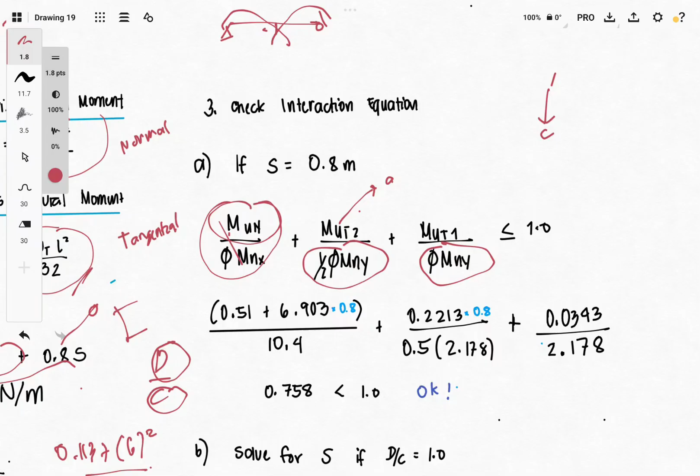There's no half for that, just one term for X. But for weak axis bending, there are two, separated. That's what's a bit tricky here. You have to be very mindful about separating the loadings and the moments you need to solve, and the capacity too, since one is considered half and the other full.

So we just need to apply the moments we obtained. For the total normal moment of 0.51, we can now apply the 0.8s into the equation for solving the interaction value.

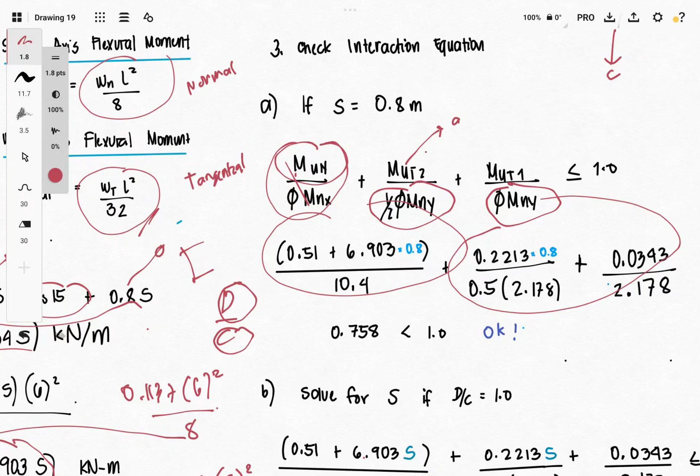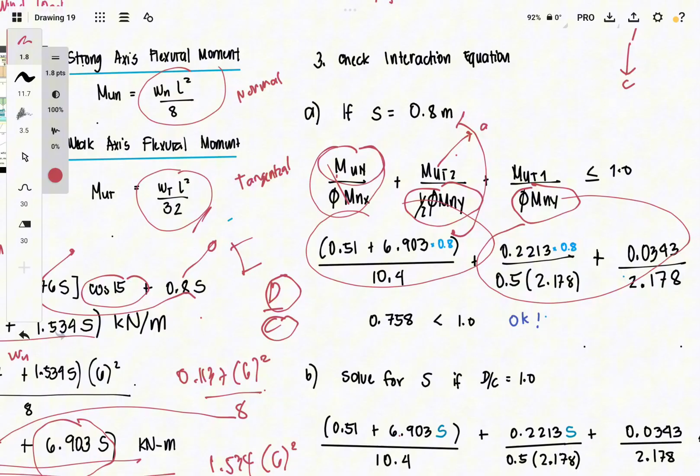Since we know that for the first requirement, the spacing equals 0.8 meters, you can plug this value into the moment we obtained. Just replace s with 0.8, and now it's already a whole value since it's no longer unknown.

Same thing for the second type of moment, which is tangential applied at the top. But take note that its capacity is half of the weak axis bending, which is 2.178, that we solved earlier. Just half of that.

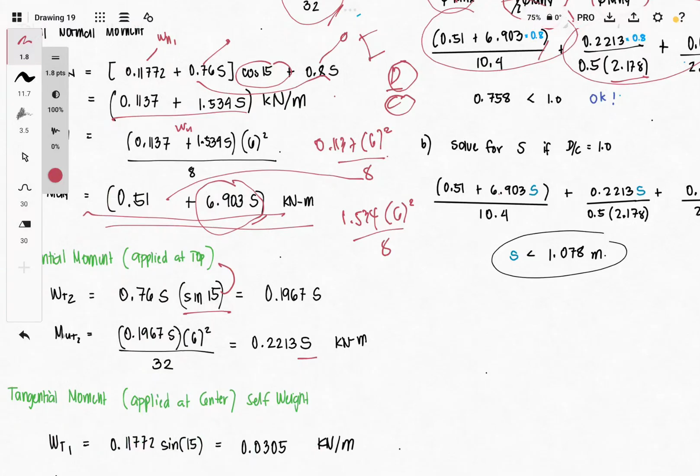Pero dun sa loadings or yung moment tangential na applied sa center, 0.0393, take note na hindi yung weight natin, self-weight, hindi siya naka-base dun sa spacing. So you can directly put 0.0393 dun sa equation, interaction equation, and the capacity is full, 2.178.

So kompleto na yun lahat. We can now solve this directly using your calculator. Wala nang unknown, then it will give us 0.758. Now, for the decision kung safe ba yung section, basta as long as na less than 1 siya, then safe yung section for these loadings applied. Yung purlin section natin na C ay safe siya dun sa applied loadings.

But if you are going to increase the spacing, pwedeng mag-exceed na siya sa 1.0, o tinaasan ninyo yung intensity ng mga floor loads. Like for DL, ang in-apply ninyo ay 800 Pascal, which is equivalent to 0.8 kilopascal. Or in-increase ninyo yung live load o yung wind load o naging 2 kPa na siya, then tataas din yung value ng interaction. Now kung in case man hindi pumasa yung mga section niyo given this loadings, then you can increase the section. Kapag tinaasan niyo yung size ng section niyo, tataas din yung mga capacity. Pag nag-divide kayo ng mas mataas na value, then nare-reduce din yung ratio.

So ganun lang yung gagawin pag design. But since ang focus lang natin is analysis, we just need to compare kung safe yung section based dito sa criteria na dapat less than 1. Then we can say that the section is safe. But for this specific problem, safe naman yung section.

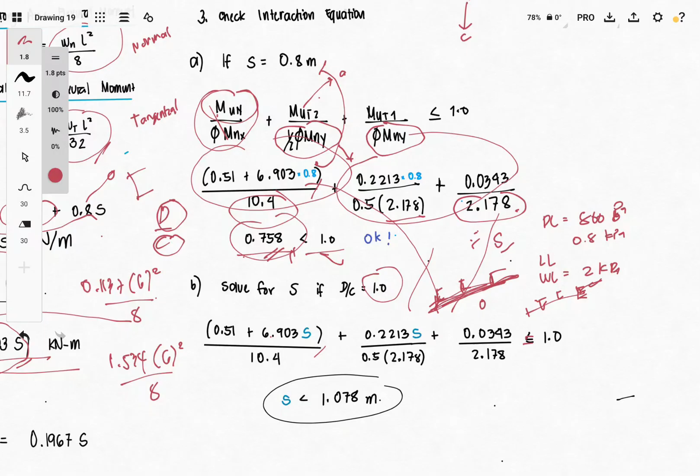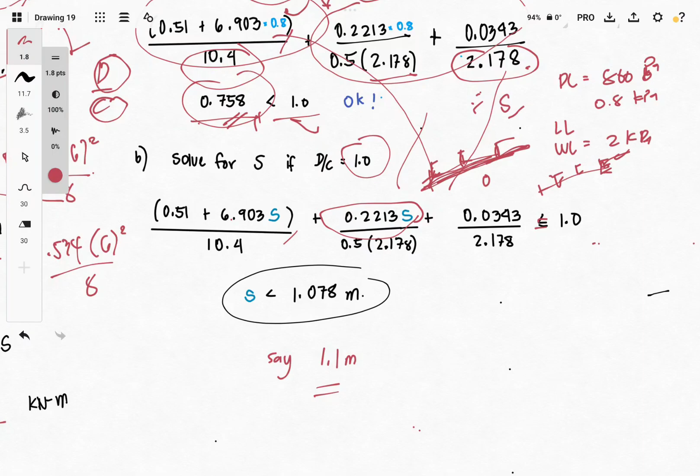This is the maximum spacing. Kailangan hindi na siya mag-exceed sa 1.078 kasi kapag tinaasan niyo pa siya, say for example 1.1 meter na spacing, then tataas na yung mga value ng moment, mag-i-exceed na siya ng 1.0 na DC ratio. So for the design, you have to use 1.078, pero for detailing, hindi tayo pwede maglagay ng madaming decimal. So you can say 1 meter na lang. Dapat round down for spacing para maging safe pa din siya.

So say 1 meter, you can have the purlins space at 1 meter. That's the maximum para safe pa din siya. And once na ma-check niyo yun ulit, dito, kailangan less than 1 pa din yun. So yun yung pinaka sagot for the second requirement.

Pero for your exam, pwedeng pagpipilian kayo ng 1.1, 1.0, 0.9, o 1.2. Ang pinaka pipiliin niyo for the most economical one ay yung pinaka-close dun sa nakuha nating sagot, pero dapat hindi siya mag-i-exceed dun sa nakuha nating value. So we can say na 1.0 is the safest spacing for these loadings and for the given section, if multiple choice. So ganun lang.

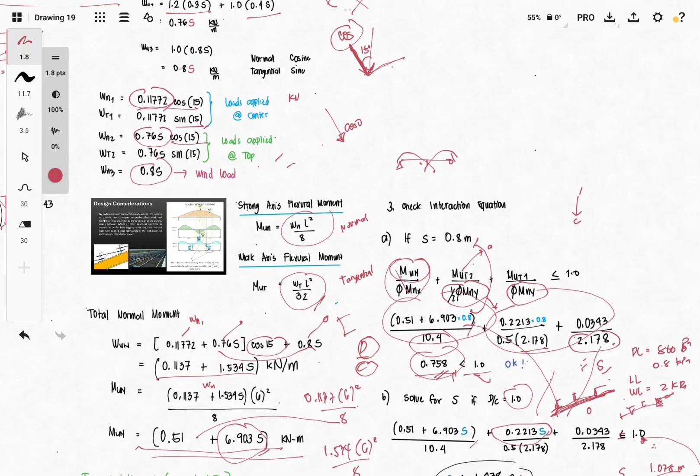So you can try to review this, rewrite this one, because for the second quiz, ganito yung mga lalabas na problem. Ganito lang yung process na gagawin ninyo.